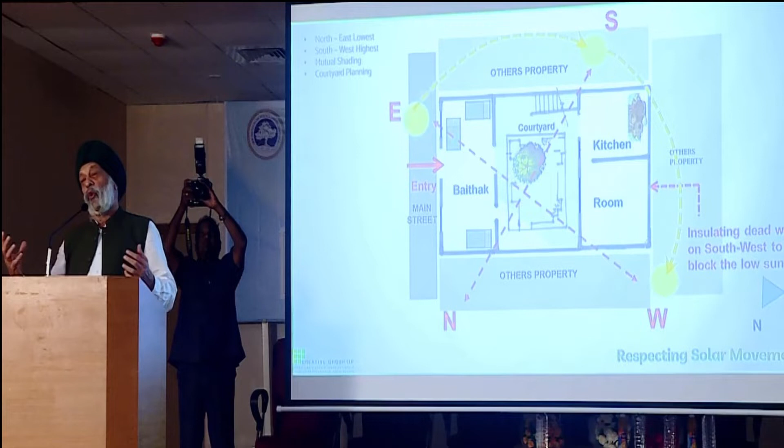Northeast the lowest, southwest the highest. Maybe if the southwest is the power or the managing director will sit on the southwest, the highest, and otherwise if your bed is on the north you will be ill, or if this is like this. No. But in case I understand the solar oscillation, the movement of the sun, the wind direction, perhaps the nature.

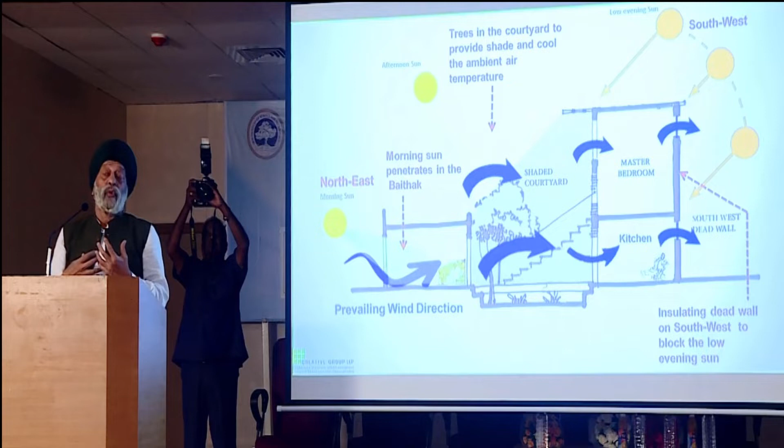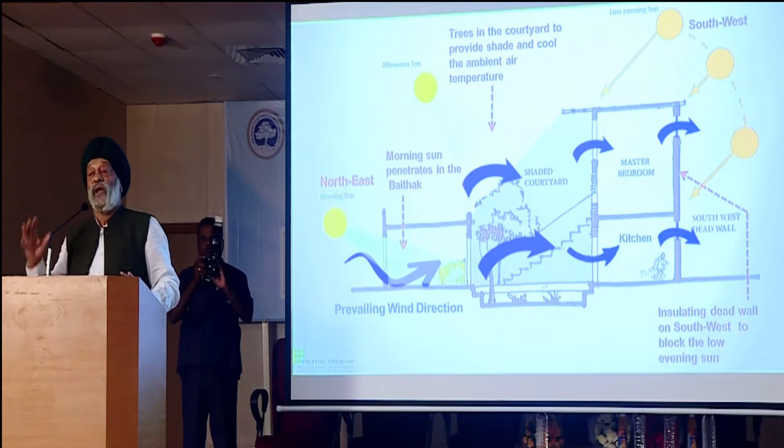And engulfing all those understanding where I'm designing, what is the climate like? Is it hot and dry? Is it hot and wet? Or is it like a cold climate? So according to the climatical condition, I see the oscillation and design and simulate. Today the tools are there. You can simulate the building and look into the various angles of the sun, the summer sun, the winter sun, and create that sort of sustainable architecture which is meaningful.

Not creating a glass tower and saying, oh, globally empowered building, and it's like an Empire State building, and I put it into Gurgaon or Chennai or somewhere else, and I feel very proud of it. So it's like, what is the place, people, and the purpose of the building gets defeated if I put something from a cold climate to a hot climate. Then it becomes like madly copy pasting. We need to understand how we create that architecture.

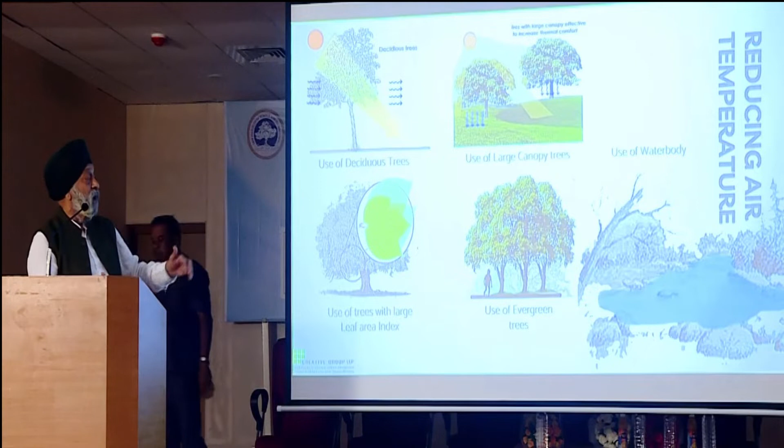So, taking the journey, landscape, how you layer the landscape. We're talking yesterday also - it's like peripheral landscape, the evergreen trees to water bodies to shrubs to various other species of landscape which put into the surrounding of the building. Then wrapping the building, layering the building with some sort of fenestration, jali or whatever, and reducing the temperature from 44 to 28 or 26 degrees naturally. So that is what is passive ways of design.

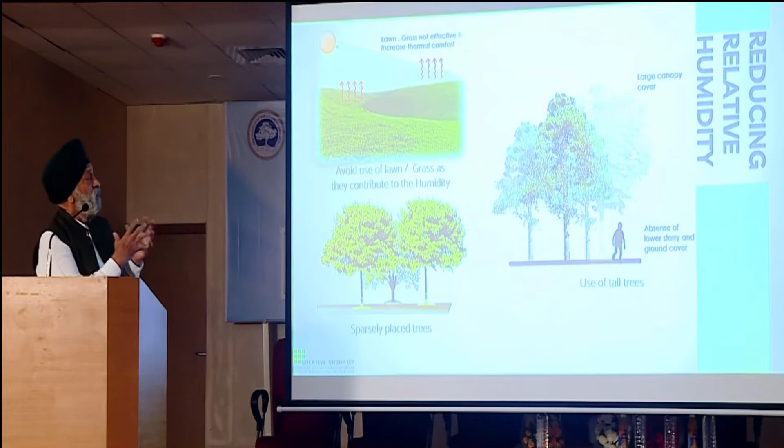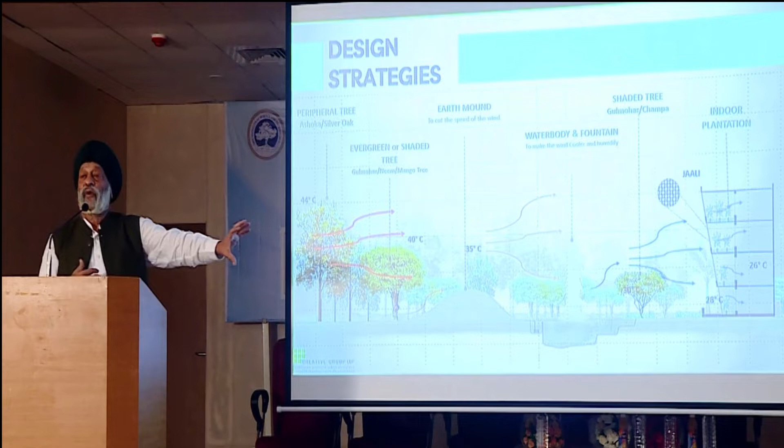Next, so this is - I'm just trying to showcase you how the speed of the wind, velocity of the wind, and also by way of these penetrations of the landscape layers, you reduce the temperature. This is how from 44 degrees you reach out to the building and you are at 26 degrees without any air conditioning. It's like passive ways. If you are able to create this sort of landscaping outside, which we call as negative space, you can create sustainable architecture.

Passive ways, active ways. I'm just going a little faster because I am trying to, from a micro level to macro level, from a small habitat, show how you can expand to the large mega projects.

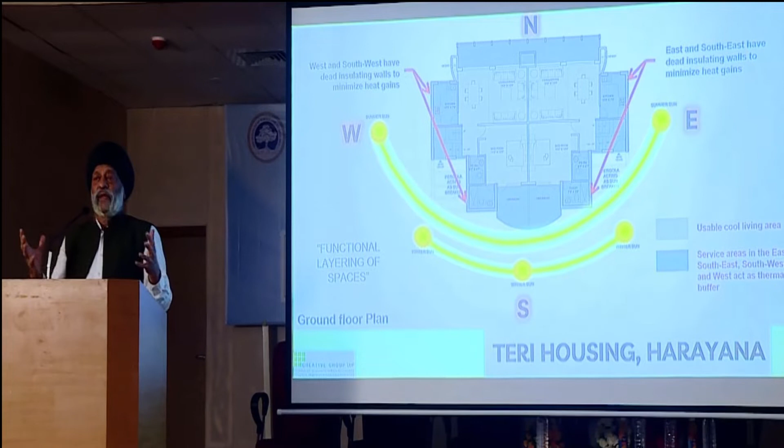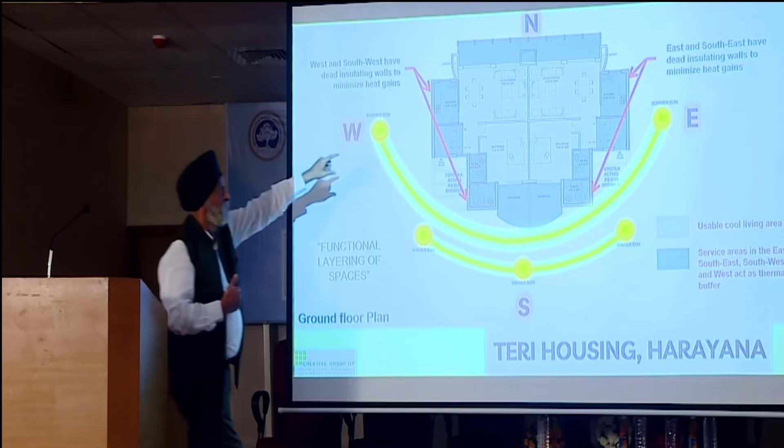This is a small example, I'm just trying to give you a concept. All the gray areas in this building are either a staircase, a kitchen, a toilet, or a balcony, and the living areas are inside. As an architect, I'm designing, it's like layering the building, wrapping the building. I'm wrapping my living areas with the service areas, kitchen, toilet, staircase, and the heat coming from outside gets insulated. Once the other areas become insulating, the living areas become cooler by way of design. So these are service areas, and my living area bedroom is already wrapped with a layer which becomes an insulating layer for the living area.

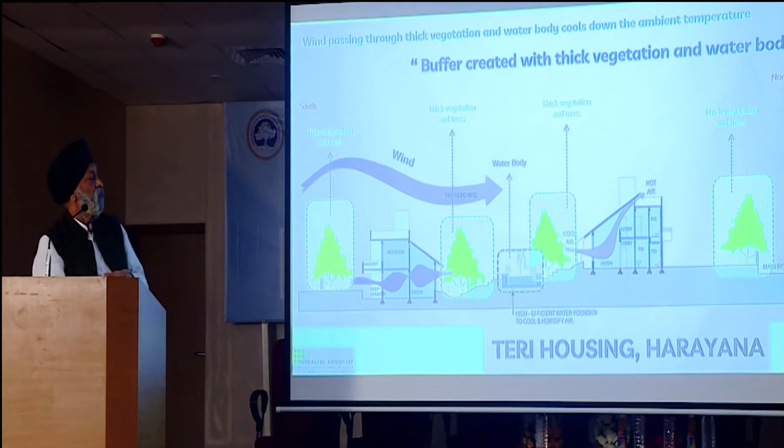Next. This is how water body, other things we have tried to establish there. Again, alternative ways, air tunnel system in the cooling.

Next, the vertical green city at Pollachi. How do you create even vertical gardens? There, Dr. Mahalingam at Pollachi, we gave this proposal to them, and how do you connect alternate play or alternate floor. We have a street connecting all the towers, so that you connect at the upper level and also create vertical gardens, as if you are on the ground.

This I will not go into detail. Next, Ananda housing in Tirupur, affordable housing. Next, NCUI building in New Delhi.

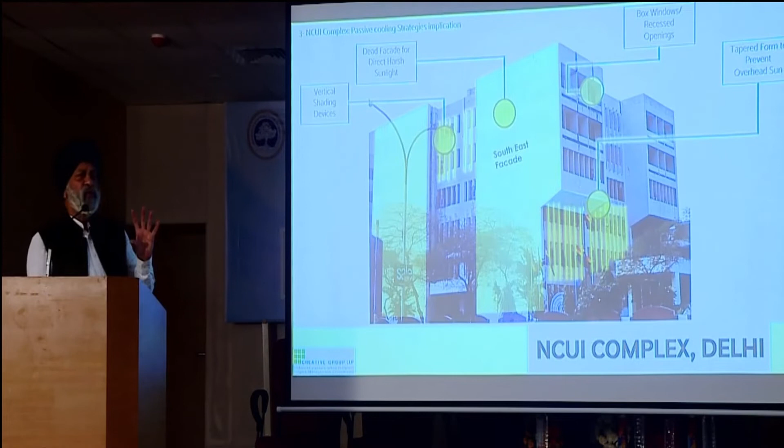Next, again based on insolation, where there is a harsh sun, block the sun, no windows. This is south, east, and west, and you block this. You have windows on the other side, so that the glare sun does not go inside your building.

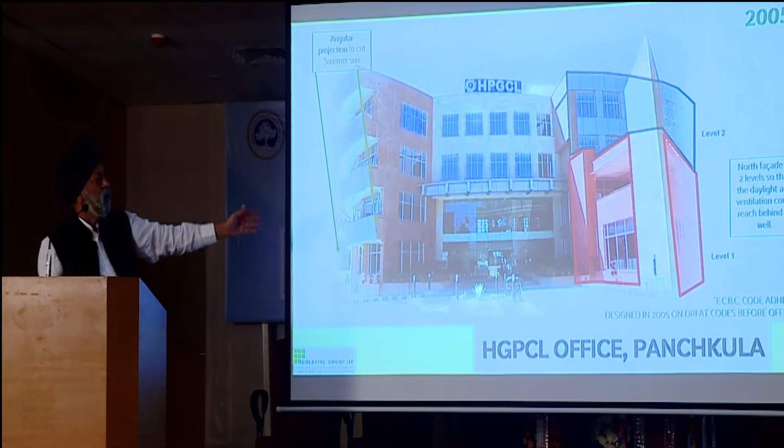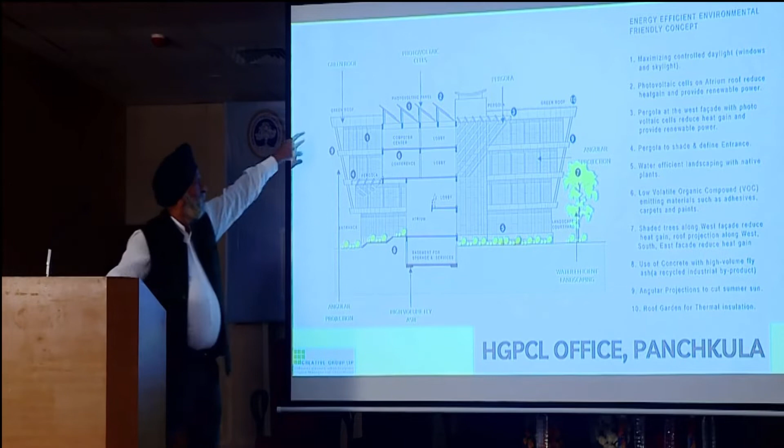Similarly, next please, HPGCL building, again you see the overhang on the south side, you see the north as the lowest, and this is again a platinum rated building at Panchkula. You can shape out the building according to your choice, an elliptical building, a triangular building, but see how the insolation of sun works. Even here, because I need winter sun, I don't need summer sun. You need to understand this angle needs to be defined, so that the winter sun comes in and the summer sun doesn't come in.

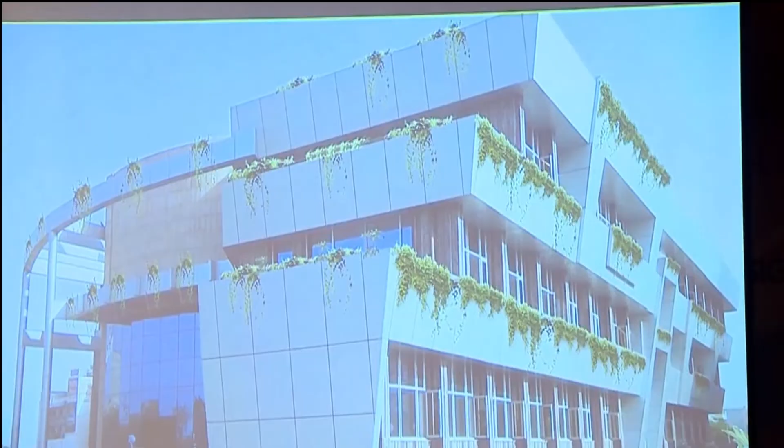Next, Times Square Mall, this is a non-air conditioned mall, just based on basic Vastu Shastra and mutual shading, taking lead from Rajasthan, from Jaipur to Jodhpur to other places, mutual shading. How you can be comfortable.

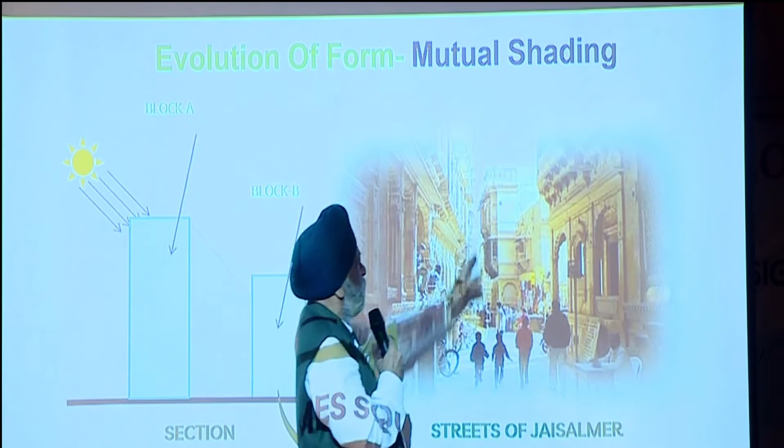Next, this is how it has been done in Naya Raipur. Again, you see this from here in Jaisalmer, you are comfortable at 2 o'clock because of the mutual shading, cutting the sun. So that is what we also do, block A, block B closer together, so that you get absolutely diffused light and glare free light.

Next, this is how jali, this is wrapping the building, covering the building with the dupatta. How do you put that wrap onto the dupatta to be away from the hot sun? And jali, I say, it is cold -- it's very hot, but I say it's cool.

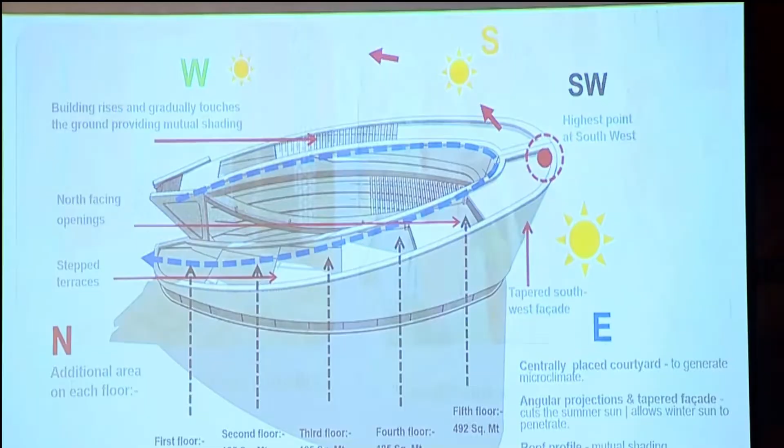So fundamental things, if we start addressing, next, this is how we simulate the whole thing, creating this courtyard in between. And this is the northeast, the lowest, southwest, the highest. Cut the southwest sun so that it doesn't go into the courtyard. Next, this is how mechanically we simulate.

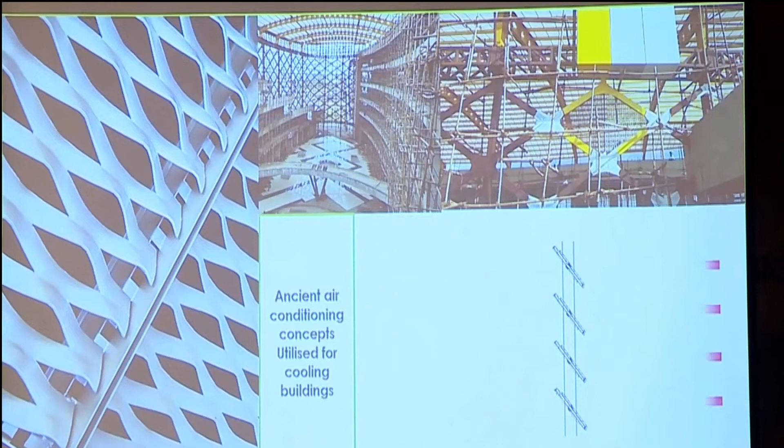Next, put this jali there, and that's the effect of the jali, how you cool out. And mind there were 10,000 people when this was inaugurated, and there was no air conditioning on. So perhaps that is what is required: innovation, visioning, new trends in architecture. Perhaps let's see that we create non-air conditioned buildings. I have maximum daylight coming in, no light on, and that is how the trends of passive ways of architecture need to be developed.

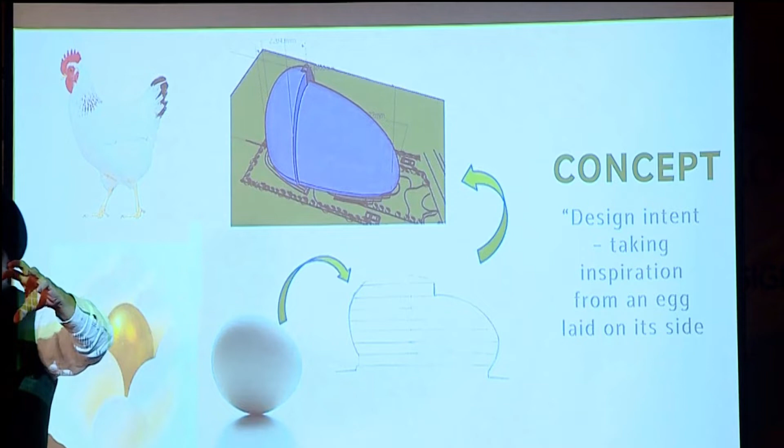Next, next, next, Suguna poultry, again in Coimbatore. This is now, Suguna is for poultry, integrated poultry. Poultry is the egg, so I said, why not get inspired from an egg, you make a building. So we said okay, laid egg. This is hen to egg, laid egg, and the smaller side of the egg is on the northeast, and the highest, the egg is just like southwest. So this is how you belongingness.

I say, oh, egg is poultry, and yes, we create this. This is the section on how you create that sort of sustainable architecture and also belongingness. And Suguna people feel so happy—yeah, it's egg. So these are fundamentally some of the principles which can address this.

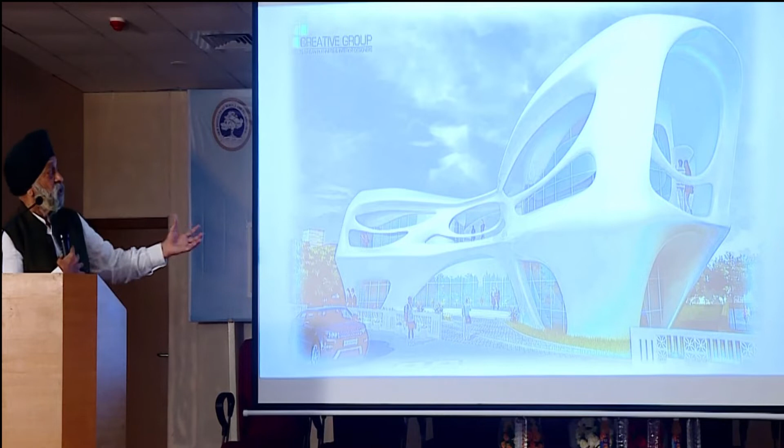Next, a club now. Yesterday I was talking to the students about parametrics and all that—how do you create that sort of an architecture? So I said, okay, we made this club in Raipur. When we made this design, the client said, you make it. How do you make this? It became very difficult for us. So you need to be comfortable in technology, to create these types of ambitious projects.

We made the mock-up. This is how you see the envelope being done and then being covered. So this is how architecture is like a process—stages of work, understanding the technology, the innovations, and then materials. It's a feel and touch with material, which is very essential for all architects to understand.

You must play that. I think we go faster.

This Textile Valley in Erode, again a very ambitious project which we did in Erode.

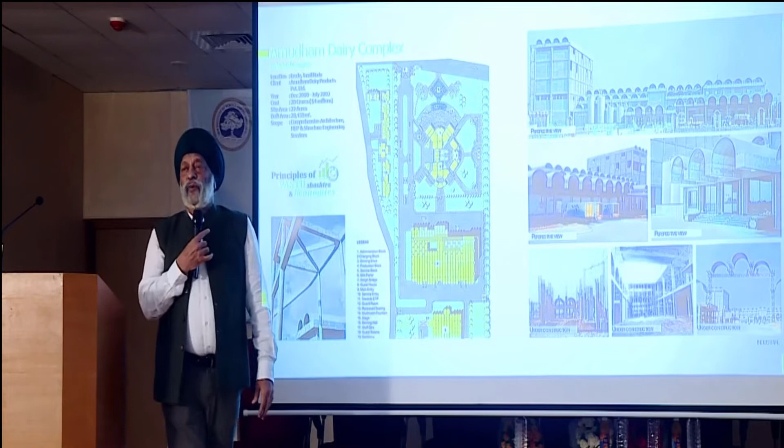Amudham Dairy, again a project where we tried to use exposed concrete and wall, and finished this project in 11 months, all done up.

This is the CRI pump building which I wanted to impress upon—the pump building in Coimbatore.

Now I will come to airports, because people know me more from the airports than the other projects. So I just wanted to play the journey of what we have been doing. I'm very fortunate we've done more than 55 airports around the globe—Gabon, Gambia, Congo, Kazakhstan, Belgrade, other places also, and Nepal.

Penetrating through the great heritage of India.

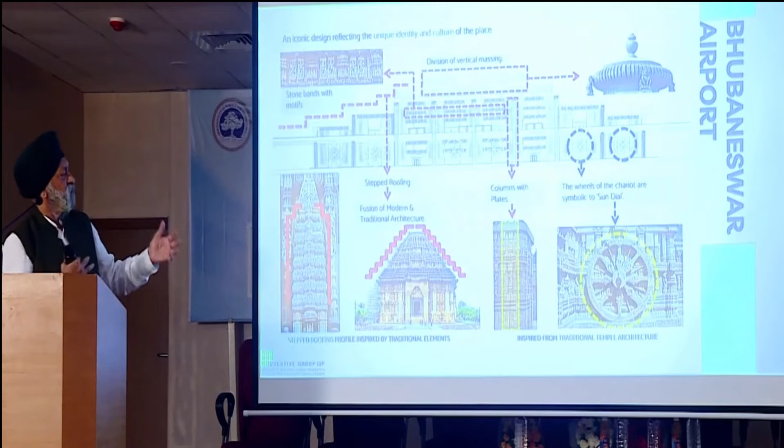This is how the Konark wheel is like a chariot, so you say Jai Jagannath here itself. That is how it is belongingness. So the purity of the form, for the purpose it is being made, needs to be reflected. All these motifs take into this—just giving you the process.

Chennai airport—because all of you have seen this, I thought you can just see the surgical details of how this was made. This is again from a bird, the wings of the bird.

That is my son—actually, he's looking after the office now. This is a glass tube.

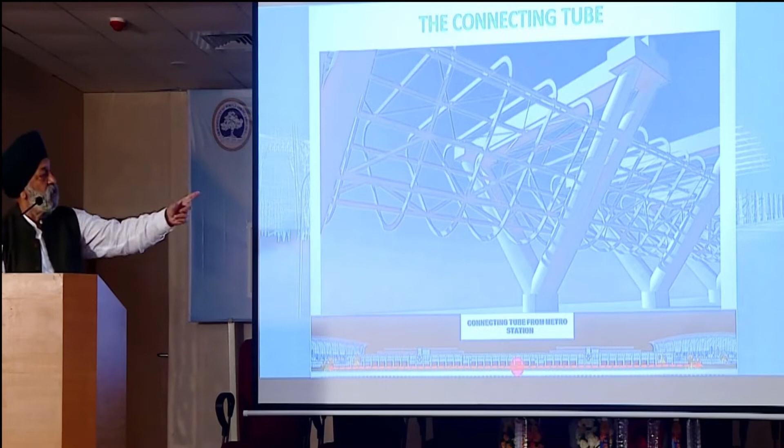This is the wings and how we conceptualize it, and this was done practically about 10 years back. Intermodality—metro station, international, domestic, railway, bus, all connected, proposed.

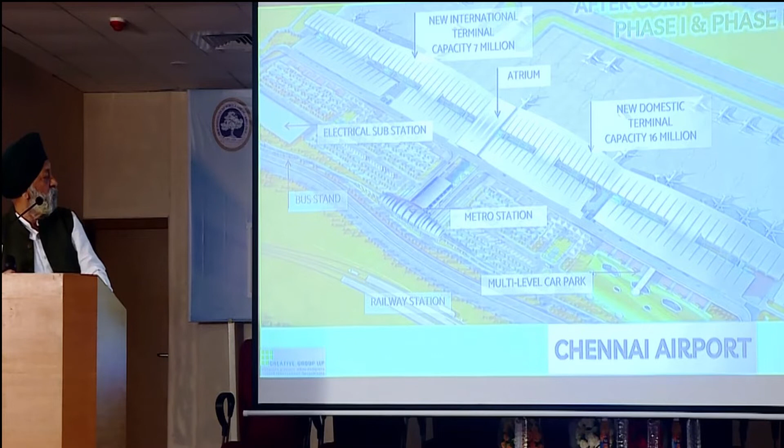This is how the concept is—maximizing daylight, minimizing heat gain. This is the central spine, which is green here, and this is the cantilever of 24 meters on the south. That is how it becomes absolutely efficient.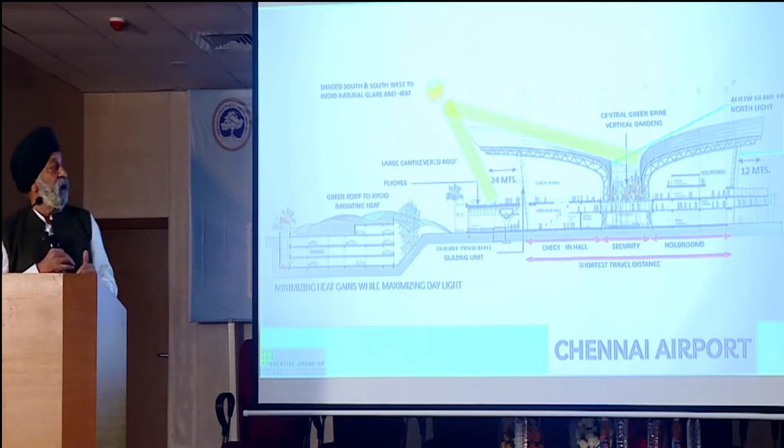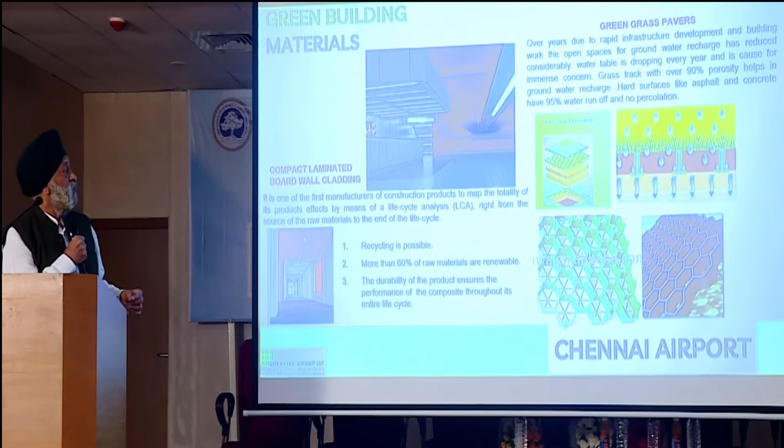Next, advanced material. I was talking about how to create green hard surface. You create these polypropylene paver blocks, and they have sufficient strength where the car can be parked, and it is all green. This is how the car park has to be done.

This could not be done here, but this is what we propose. This is how vertical gardens were created, and construction. Raipur Airport, again I am just showing you the dynamism of the structure, like avian, the shape of the complete design, how the form works.

See this now. Here we are able to create this car park. This whole car park is all green, all green hard surface for car park, and you will not get any radiating heat inside the building. This is how the terminal building looks.

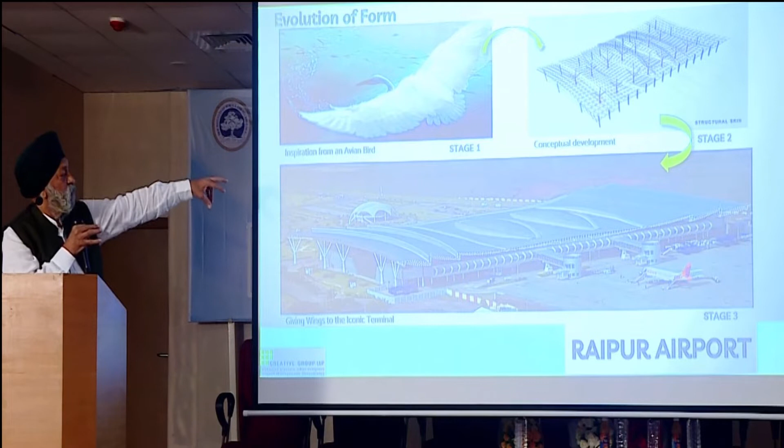This again, avian-like shape food court. This is how the complexity of this, how you really do everything, every piece of steel fabrication to be measured, computerized, all the 3D work has to be done, and then you are able to create this.

See how the mood changes. Then putting the local flavor inside, like Bastar art, and making that water body, all within the airport. This is how it looks from inside.

Here again we talk about water conservation. We have a lake, we have solar. Wherever possible we create that, so that we store our stormwater and use it for landscape, for air conditioning, and other purposes.

Vadodara, a very simple form, dynamism - how simplistic could be dynamic. So that is what we created. There is a video of this also.

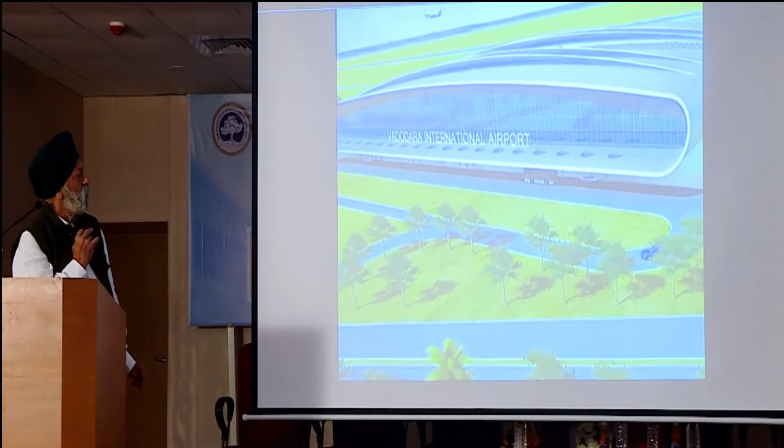These are the actual photographs from inside. No false ceiling.

So again, you see this, that we are closed down on the west. West is all dead facade, so that there is no heat going from that side, no glazing on that side. And here it's again south, so a projection is there, and you practically cut the south sun.

So principally, all the specific ways, maybe it is a smaller project or a larger project - only thing is the process is to be seen, that how you are creating this. Next, east and west. This is a food court.

This now, east and west sides are wrapped, practically no windows. This is a food court, outside. Prime Minister inaugurated.

Agartala. Again, simplistic dynamism. Play with the art and local flavor inside, interior. But large span structures need to be there. So that is how the technology and the local flavor can be put - all these elements are added into the interior.

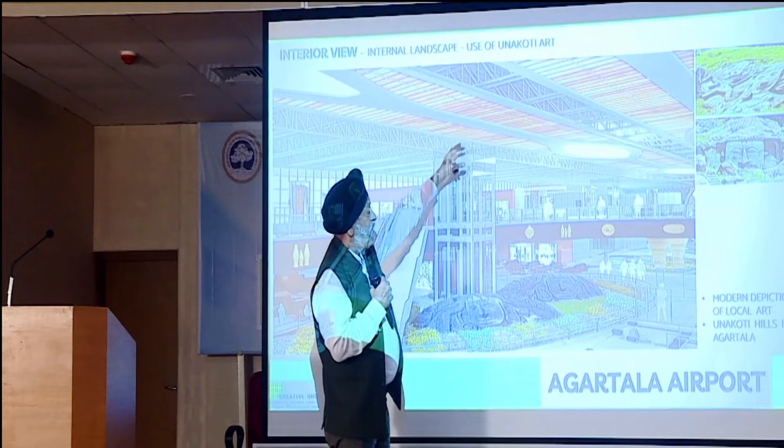This is how the interior bamboo effect, this is how we have actually done the local art here, the bamboo effect here, the local art here. All these are elements which we try to showcase, so that you say yes, this is in Agartala, and it has my belongingness, and it has that culture, heritage values, and then it starts breathing, it starts vibrating, and that is putting life into a dead element.

You get attached, like we performed puja, and similarly these are the idealistic ideas of our understanding. Connect with the local flavor, you put that. This was inaugurated in COVID by the Honorable Prime Minister.

Varanasi. Yes. Now, can you put, yeah. I will not go into this.

This is how Varanasi is a city of temples, and the performance of Aarti, Ganges, silk saris, carpets - wherein how they reflect all this into the art form, into when you arrive by air. And this is what we shape out as the Ganges, and this by itself gives you the waves of Ganges, and you are at Varanasi.

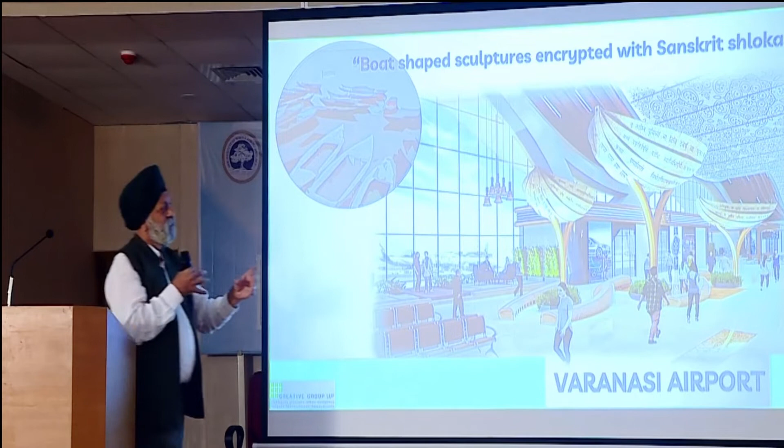So this is what we're doing. We put this boat here and the Sanskrit shlokas there in the false ceiling, and it's hanging out there, and you feel attached. And then you see this pattern, the silk sarees. You make the false ceiling. Next, more stronger, you see this here.

So you just pick up the various things, the culture, the industry, the religion, focus on all these things put together and put that into art form, in design form, integrating various layers of design. And how do you interface various layers of design to make a complete architecture.

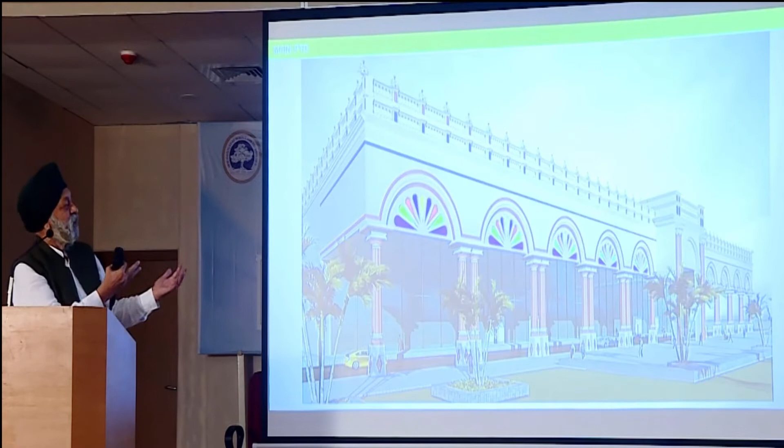This is now again Tuticorin airport, which is under construction. I have just brought some of the things I'm doing in Tamil Nadu. So this is again under construction, again local flavor. A 500 crore project, how you put all this within the built form and create the belongingness. Yeah, this is mine, this is Tamil Nadu, and I feel proud of it.

So this is how we have diversity, but that's the character of India. Wherever you find things different, but we're similar. That's the interesting part of it. That's what I was talking to you about, and how fascinating, this like a North-South dialogue. But soul-wise we are one. That's the greatness of the Indian cultural heritage.

We think that every place is mine, and I belong to this great human settlement on this part of the world. So this is all we're doing there, under construction. Go ahead, go ahead, you're putting nature.

Now from airports, I just want to skip over that. That was the first proud assignment of airports, which we feel very proud of, that's why people adore and call me the airport king, and we've done more than 54 airports.

And today, mind you, India is in new making in railway stations. All the railway stations are getting revamped, and they are becoming epicenters, district centers, because they already fall into the center of the city, and the land is the costliest there, and we need to facilitate last mile connectivity, an intermodal hub, where all the modes of operation are changing because we have no place on the road.

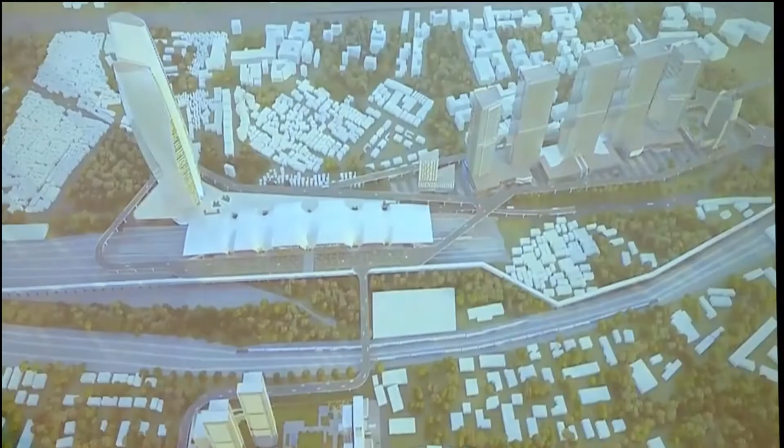So these are about 40 of the railway stations. Very ambitious projects, very large projects, like this is Bandra railway. It's about more than, it's like a 25,000 crore project, there are a lot of people. All these things are on the railway land.

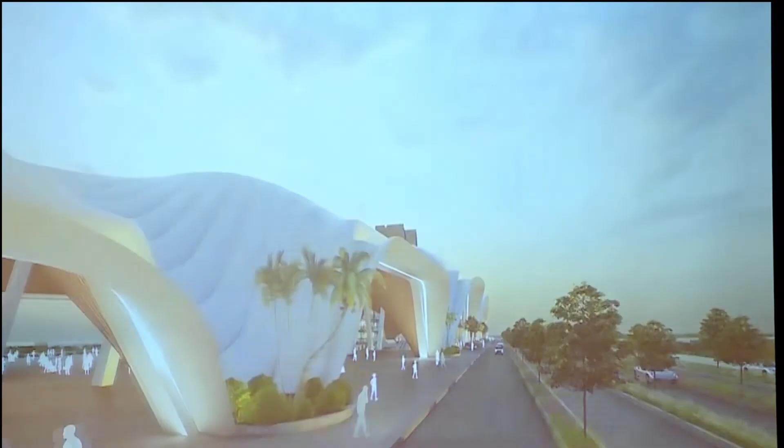How are you going to see the cities of tomorrow, like India of tomorrow? That's how this is, we have no place on the surface. How do we generate spaces with no spaces? It's now layering. We're adding another layer at 12 meters, and then you have the elevated railway station on top.

The arrival, departure is separate. There are more egress routes because the traffic is so much that you need to see the easy movement of people, away from the exit from the railway station, and all this is happening. This proposal has already been approved by the ministry, and we're floating the tender for this.

So this is again Howrah, one of the very, very ambitious projects. It just falls on the river. It's like waterways, it's metro, it's railways, it's bus, all, and then intermodality. How do you connect? How do you create these riverside piazzas? This is what we tried at the railway station, keeping the heritage also intact. So this is what is happening.

Chennai Egmore, this is under construction. This is the new station which is being now erected on the other side of Chennai Egmore, so that you have more entries and exits to the railway station. This is the concourse, the center concourse, and then you come to the platform.

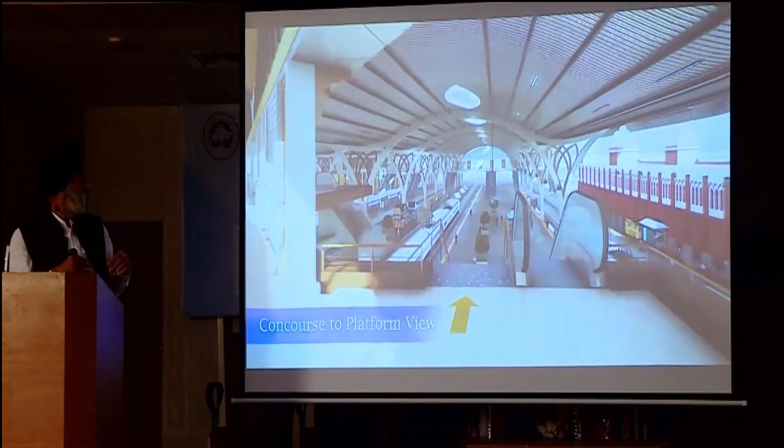Raipur, this is under construction. Again, about 600 crore project.

Chennai Egmore is 1300 crore. So I am just showcasing you that you have so much of work. Even sky is not the limit. Never get afraid—yeah, we have no money, we have no salary, we have nothing. It's like a gestation period. Perhaps an engineer can earn faster, as a package. But you would, in case you have the passion, sky would not be the limit. There's so much of work.

So let's see, this is Ghaziabad, under construction. Again, a 1500 crore project, all under construction.

Intermodality, last mile connectivity—how do you create all these things? It's so that tomorrow somebody should not say, whatever we have done, it's all nothing, we have spoiled the city. No. Let's see, when we are now transforming New India, it has to have some language. It has to be global. It has to be comfortable.

So this is how—this is Baroni, this is Coimbatore. So we're trying to use the land. This is in PPP mode. Again, very shortly this tender is going to come in.

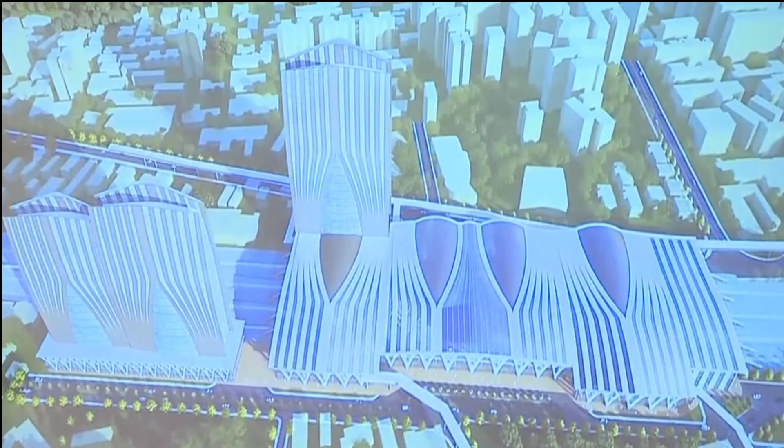Borivali, again in Bombay, very ambitious project. It's about 28,000 crore. PPP mode—all these towers are going to come in.

How ambitiously we can use the airspace, on top of the tracks. Create the concourse—because on the railway station, there's nothing but the track. So how do you see that airspace can be properly used? And they are all in the center of the city. So all of this needs to be defined. This is what—a new language to the cityscape is being created.

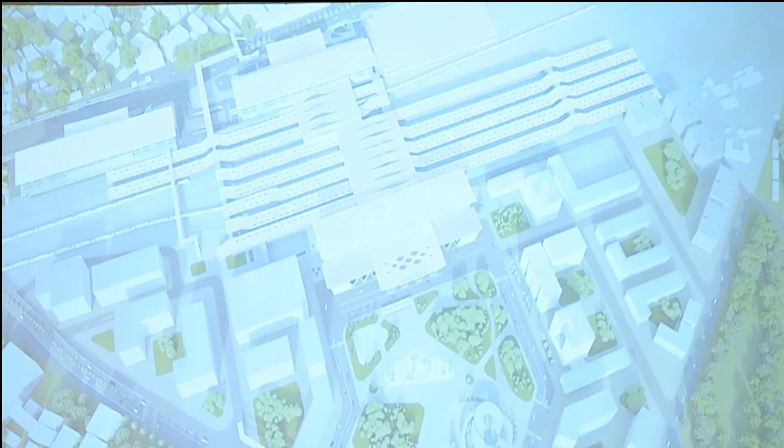Tambaram, next here, is also now getting absolutely renovated.

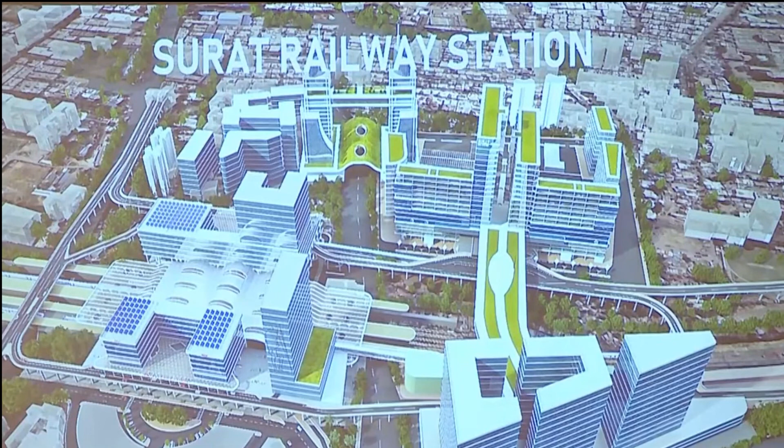Next, Surat railway station, very ambitious project under construction, 15,000 crore. This is Surat. This is Kota. This is also Kota.

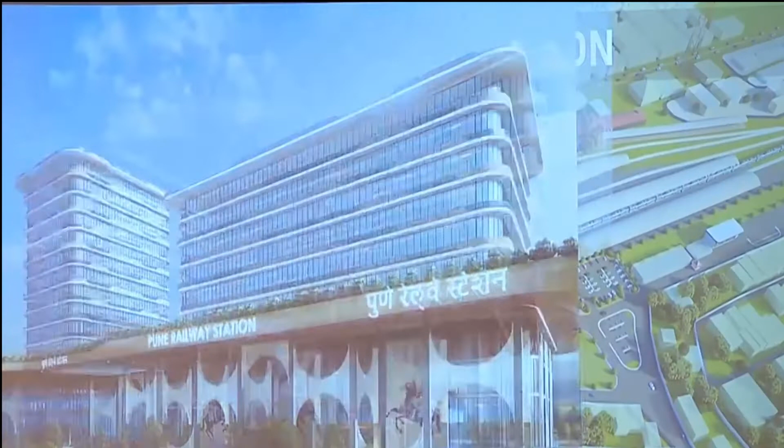Next, Lokmanya Tilak in Bombay, again a very large railway station project. Next, this is Pune, again very ambitious railway station project. Next, Wardha.

Just keep on doing it. Agra—keeping the heritage of the great city, so that it doesn't get distracted. So that is what we've done in Agra. Scope of architecture—they never get bogged up, and you can really win over.

And see, only thing is you have to scale up capability and capacity statement. You need to be capable enough to deliver, to handle such large-scale projects. And if you're capable, you need to make capacity building. How do you enlarge your vision and create that sort of scaling up?

Yesterday we were talking to a student. He says, airport is a very big scale. You need to come out from like a well and see that scale where you talk about holistic architecture, dynamism in architecture. And now I said the capacity building, because we're going to get 100 crores of urban population by

2040. How do you create for that 100 crores to move around? Last mile connectivity, walkability—all these services need to be addressed. Only then will we be able to proudly say, yes, we are a proud nation. Those are the ambitions.

Next, what? Some problem? Okay, so I mean, that's why I'm just concluding—another 15 minutes, if you can bear with me—because I've shown you the railway stations. Now I'll show you how things are happening in waterways, what are the various things happening there. Land ports, highways, and then like I told you about ropeways.

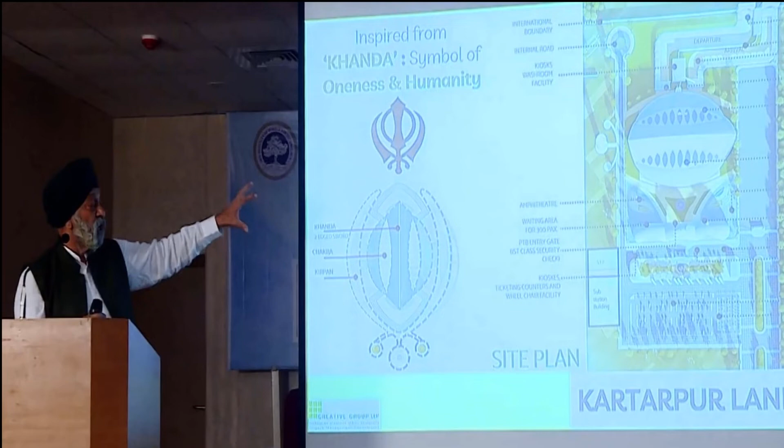So that is what ambitiously we see. Now done—so this is Kartarpur corridor, which was a very ambitious project. We did a 400 crore project in 4 months' time. Again, a LEED accredited building, based on Khanda—the peace, prosperity, harmony, oneness of Nanak—and that is what we created.

We have a 300 feet high flag mast here outside, so that the Indian flag is also visible from the Pakistan side, that we were seeing, where should we put it so that our pride is visible from the other side of the country as well.

This is how it looks, and at this place Narendra Modi ji also took a selfie. We put the complete travel of Guru Nanak, 32,000 kilometers from east, west, to south, to Makkah and other places, narrating all of it. We put sculptures and other things so that once you are there, you feel that you are reaching Guru Nanak. That is the type of philosophy we want.

This is the Ik Onkar.

This is now in Vizag, we are making a ferry terminal which has now been started.

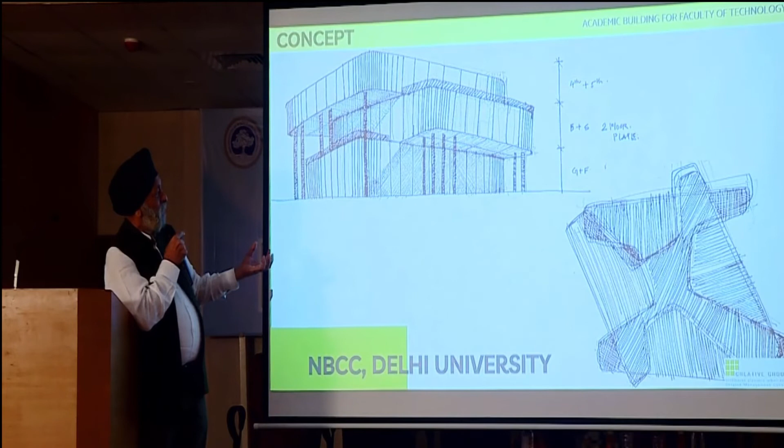This is how we simulate the building, see the shade and lighting system, wall ratio, glazing ratio, how you put that. Simulate, rotate the building, place it in a manner that maximizes daylight and minimizes heat gain into the building, making it absolutely sustainable.

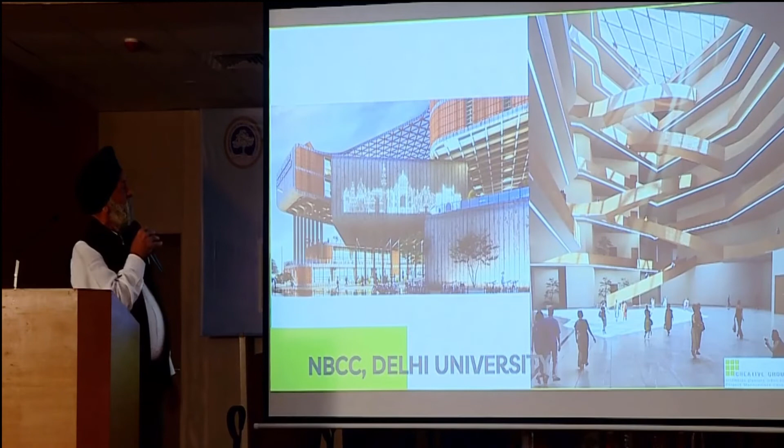This is how it looks. GEMS School in Kochi, which has been done and finished.

This shows smell, touch, feel, hear and vision, sensitizing with 5 senses, how do you create that. Then this is the backwaters, these are the courtyards, so that wind from the backwater goes into the courtyard and you feel comfortable.

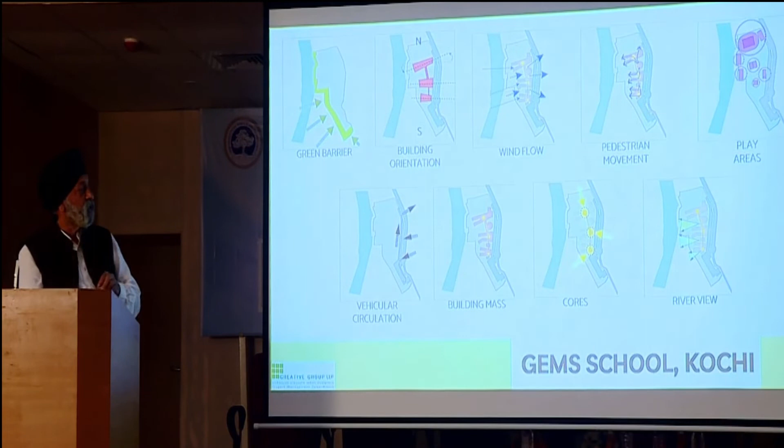This shows the process of development, design development. This is the complete building.

Anna University here in Tamil Nadu, the sports arena, which was again a design competition. We won that and work was awarded, but it has been stopped because some trees are falling in that, so they need to get the clearance.

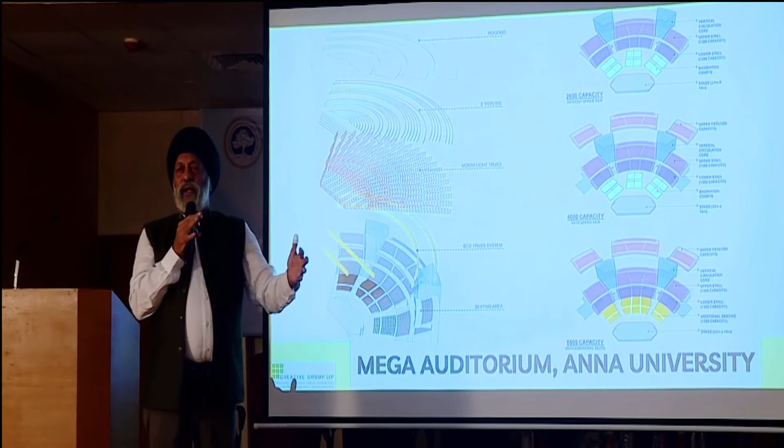This is how the solar siting works. It has 8 badminton courts inside. Then you can even have plenary sessions, making the complete auditorium into mini seminar rooms.

This is Kongu Engineering College, for a capacity of 5,000 people. This is the auditorium in Kongu in Perundurai.

This is now based on Garuda. Here's how you create the shape, how you create the wings, how the 3 wings have been created into the auditorium. This is how you shape it out, one wing, second wing here, balcony here, stage here.

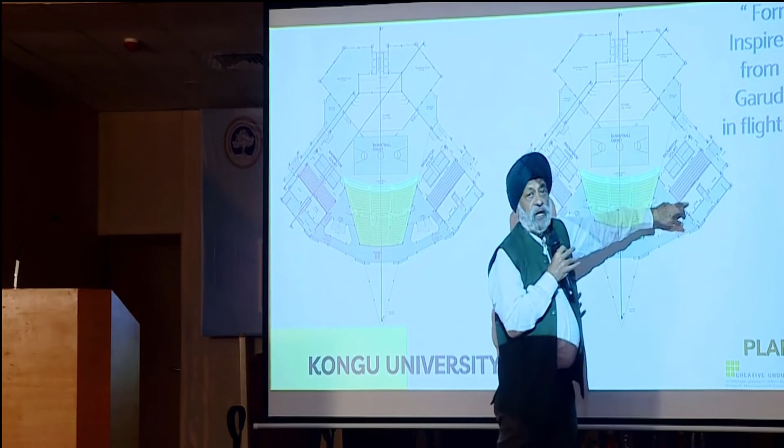Then it gets converted into a basketball court here, and badminton courts here. So it's like 4 badminton courts with 1 basketball court plus an auditorium for 5,000 people.

This is how it looks, complete. This is how 5,000 students can reach out to this auditorium.

Jamshedpur city, we were very fortunate to give the master plan of Jamshedpur city 2057 to the Tatas. This is one of the only private cities, 64 square kilometers, with 20 million tons of raw material coming in and 20 million tons of finished steel goods going out of the city. And how do you create this as a 24/7 and greenest city?

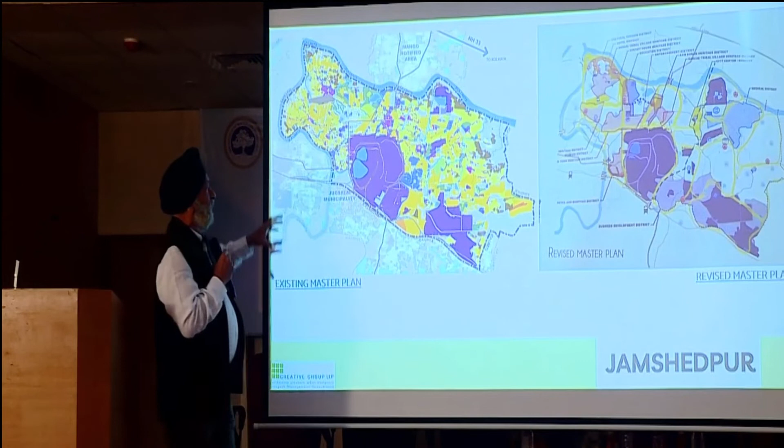This is like town within park, park within city, how do you create that? So this is how we analyze. This is Tata Steel, this is Tata Motors, this is all mixed use or residential, this side is the Domuhani River, and this side is the railway station. So how do you do that?

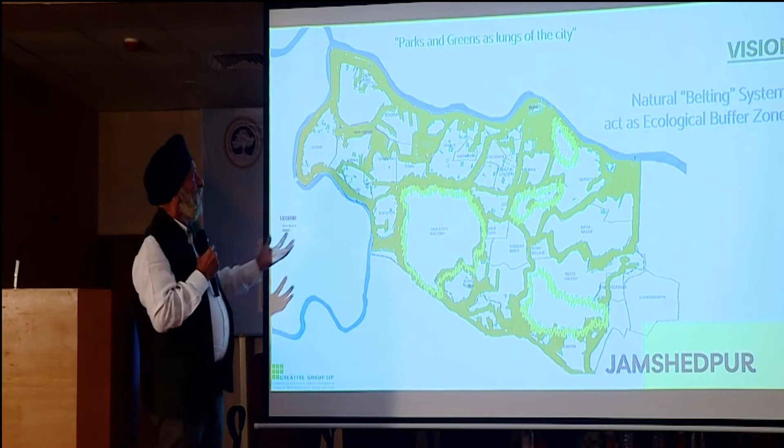This was the situation when we went there, this is the green space which is available. So I said, what are the various other vacant spaces? We collected those, and this is how we collected all the vacant spaces and made them into green. So now from one neighborhood to another neighborhood, you are walkable. These simple things we did, and this is how we gave the master plan 2057 to Jamshedpur city.

We even covered the main peripheral roads with green on top, making the city absolutely green.

Memorial, next: Gopinath Munde's Aurangabad project. I'm showcasing this to students because these are very ambitious projects where you can put language and vocabulary innovation into the design.

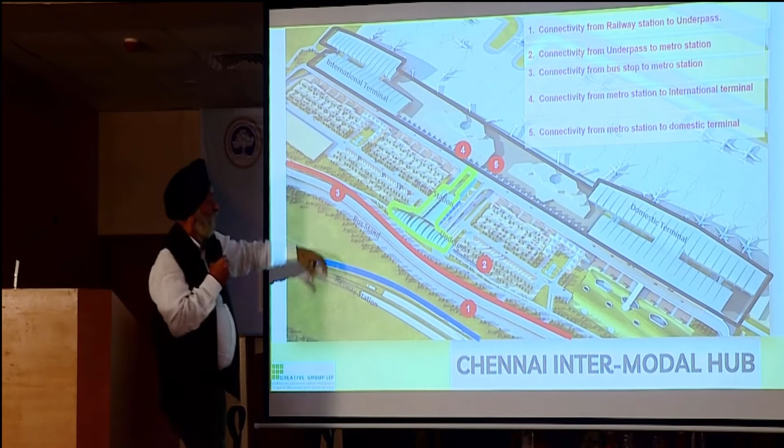Next, the metro project: how do you create last mile connectivity in metro? We have done this on more than 50 metro stations. This is the Chennai intermodality with railways, as already expressed.

How do you connect this to the airport? Intermodality from metro to railway station, fully connected. This is how you go from metro to the railway station. This is the metro station we did at Chennai airport.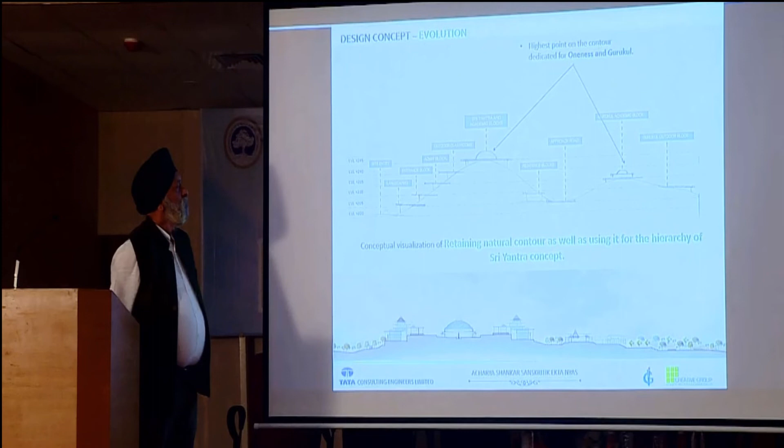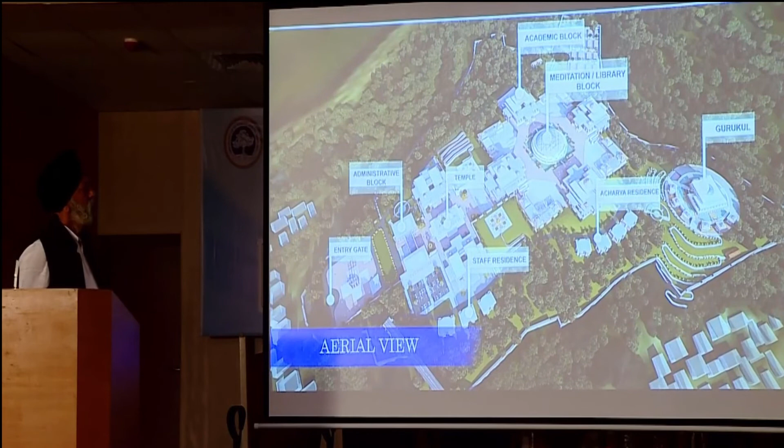The proposed International Institute of Advait Vedanta is based on the principles of Guru Adi Shankaracharya's philosophy. Our proposal conceptualizes the design by exploring the 5 elements, also known as the 5 Mahabhutas, through 9 doors of the body known as Navdvar, to reach the 10th door, also known as the soul or oneness. The center of the soul or oneness evolves from the philosophy of Sri Yantra, also known as Sri Chakra, a sacred instrument used for worship, devotion and meditation. Sri Yantra symbolizes Shiv Shakti through sacred geometrical patterns, arranging the blocks throughout natural contours in different directions, signifying the 4 Pithas established by Sri Acharya Ji, held together through a central focal point or block known as the meditation center.

The central block or meditation center holds the true significance of oneness. The hierarchy of the blocks emphasizes the grid of 9 times 9 as per Nagara architecture.

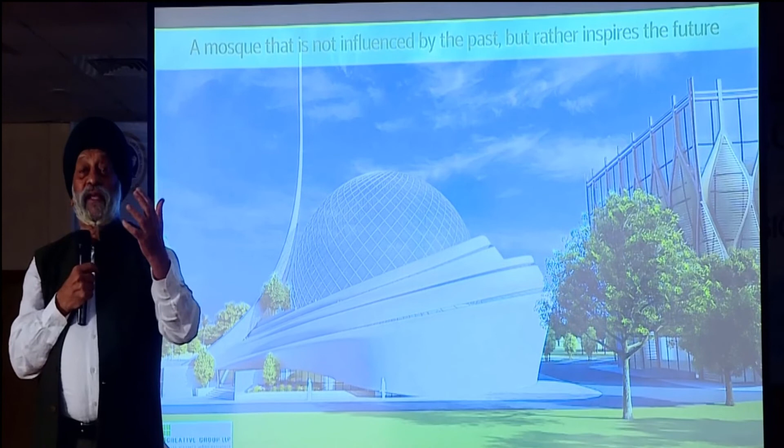Now, since this was all Vedic Hindu and Sanatana architecture, we were fortunate to also work on the Ayodhya Mosque, which is Muslim, Islamic architecture. Myself and Professor S.M. Akhtar designed this mosque, from Babri Masjid to a mosque at Ayodhya. We asked how we could do a contemporary mosque without any minaret, without any arch, without anything, but still indicating the basic principles of Islamic worship.

Taking inspiration from various masjids and the fluidity of forms done globally in contemporary mosque design, we studied all this and presented it to the board showing how these things could be expressed in a modern manner.

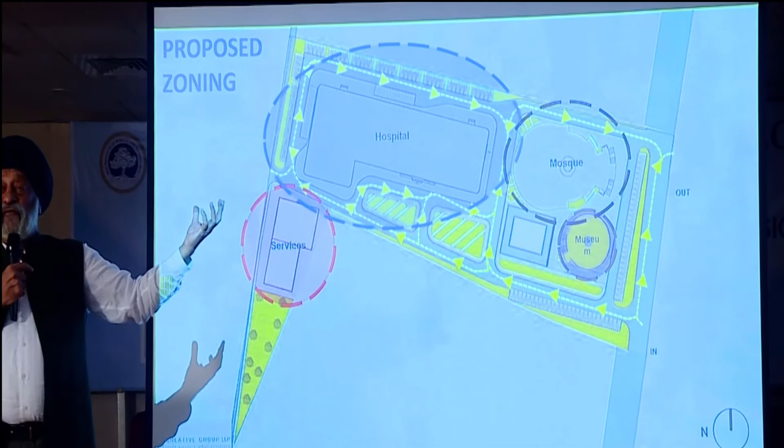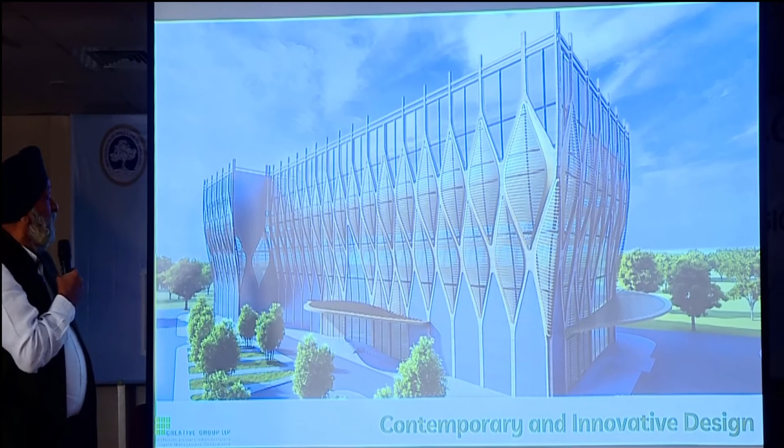This complex has a museum, a 200-bed hospital, and the mosque. This is how we designed the mosque's gathering area and the prayer area, including a prayer area for women, shown here in section. This is the 200-bed hospital building, and this is the existing dargah at the site.

I just wanted to give these flavors. Now, in the last 5 minutes, I'm showcasing how Indian architectural thinking and practice has now expanded globally.

It's not just transforming everything from global places like America and London to India - Indian consultants also have the opportunity to work outside. We're working in Gabon, Gambia, Rwanda, Belgrade, Kazakhstan, and Nepal, giving consultancy there. These are the places we are working, including Gabon Airport, which we're doing now under construction.

This is how we try to put this together - the Center of Excellence at Rwanda. Just giving a glimpse of so much opportunities to work. Never get bogged down thinking there is no work, there is no salary. There's so much. Never get disheartened. This is Gabon Airport.

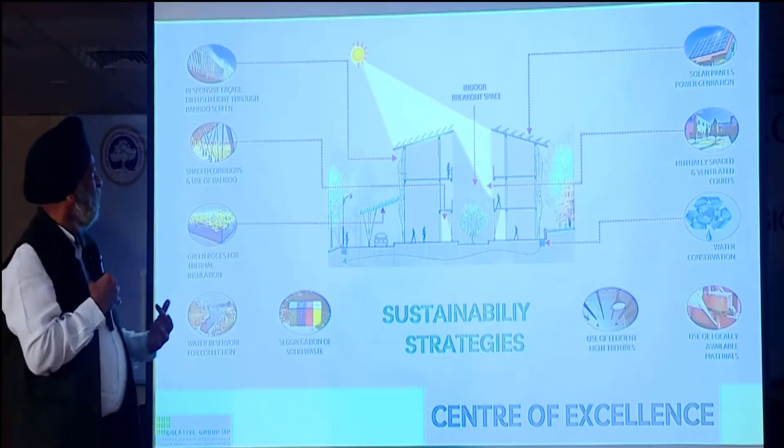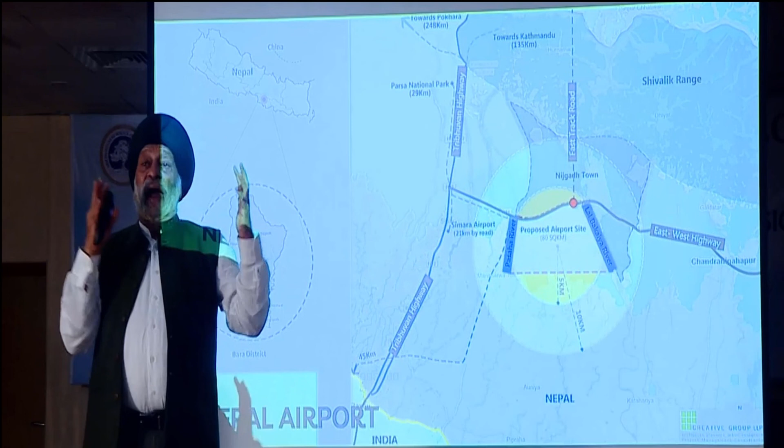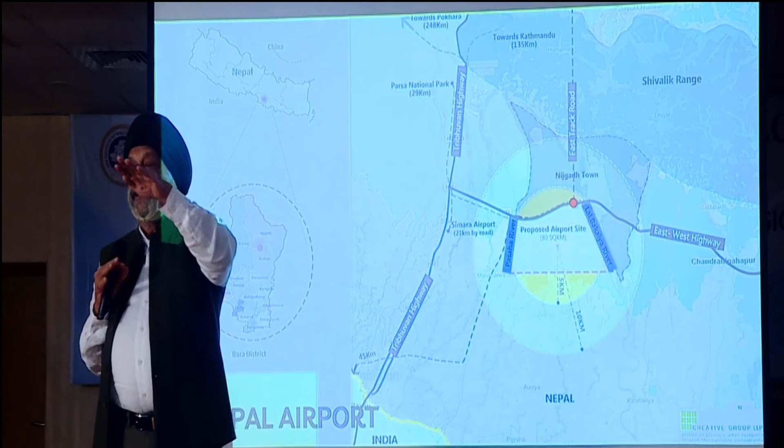That is what we do, looking beyond architecture. We have a team of all experts under one roof. Nepal is like this, with only Gorakhpur - there is no other place from where the air can go. The other side is all hills from China, and only from Gorakhpur, very small, and they already have about 8 airports in Nepal. How do you see that there is no airspace conflict? All these are happening.

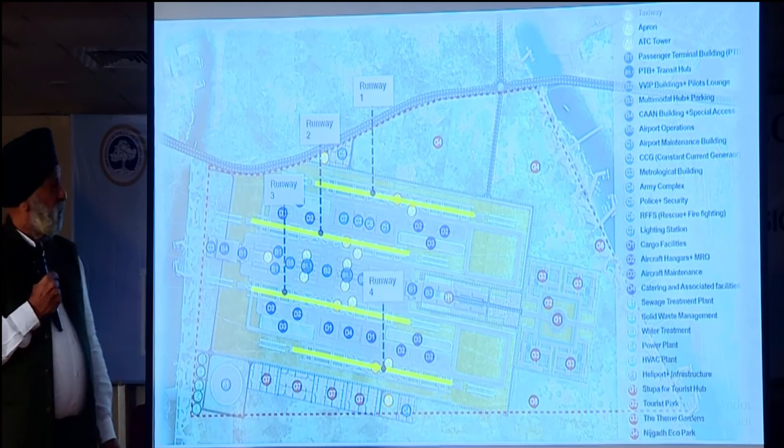This is how 1, 2, 3, 4 runways on 20,000 hectares of land, and this is now we've done the master plan. We're doing the DPR now, and the first phase will be very soon. Again, Turkmenistan, where we're doing the terminal building.

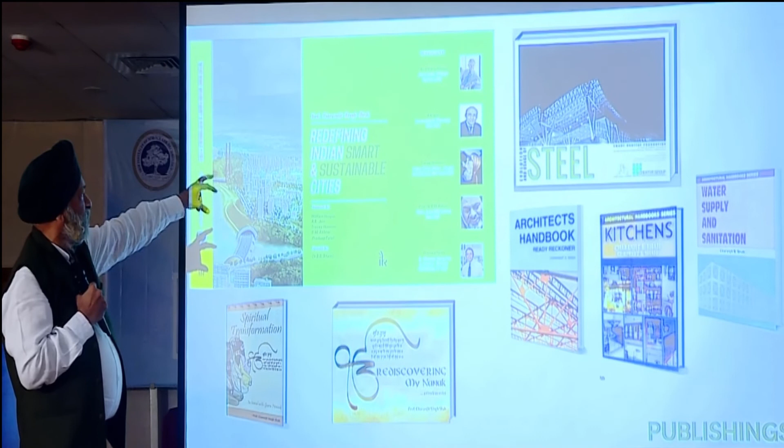And these are some of the books, like Redefining Indian Smart Sustainable City. I've authored a steel handbook, books on kitchen and water supply, and some spiritual books also. This is Seed to Surrender, my autobiography.

I'll very gladly give it to you, Lokeshji. I brought one for you.

These are the, I brought one A+D, which is fully dedicated to me and to my profession of 50 years. I brought this copy to give to Mr. Lokesh. Another book, Glitz, which has been fully dedicated to our profession.

And lastly, I say from Guru Nanak's verses, Pavan Guru, Pani Pita, Mata Dharat Mahat. Let's see that we have the purest of pure air. We have the Mother Earth, the purest, and we do not rape the Mother Earth. Similarly, let's not rape our rivers, water, Ganges, and make them polluted. Let's see, these things belong to us.